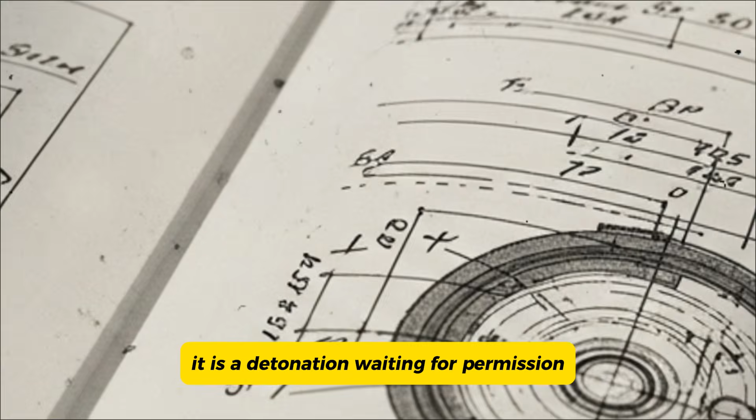In the spring of 1847, a locomotive sat idle on a siding outside Ghent, surrounded by government officials, 3 engineers, and a Belgian railway inspector who refused to go anywhere near it. He had read the reports. He knew what had happened in Prussia, in England, in the Netherlands. He wrote in his dispatch to Brussels that same afternoon, "This machine is not a locomotive. It is a detonation waiting for permission."

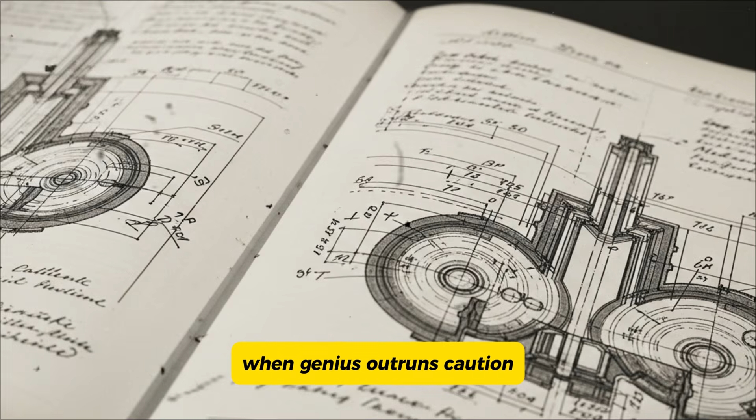Within 18 months, it would be banned across 12 sovereign nations. The locomotive was called the Pressawerk, and almost no one alive today has heard of it. That erasure wasn't accidental. The story of the Pressawerk is the story of what happens when genius outruns caution, when an engineer builds something that works magnificently, right up until the moment it destroys everything around it.

It is a story about ambition, about the terrifying gap between theoretical engineering and the chaos of actual operation, and about how one machine forced an entire continent to rethink what it meant for a railway to be safe. It began, as so many engineering catastrophes do, with a problem that needed solving.

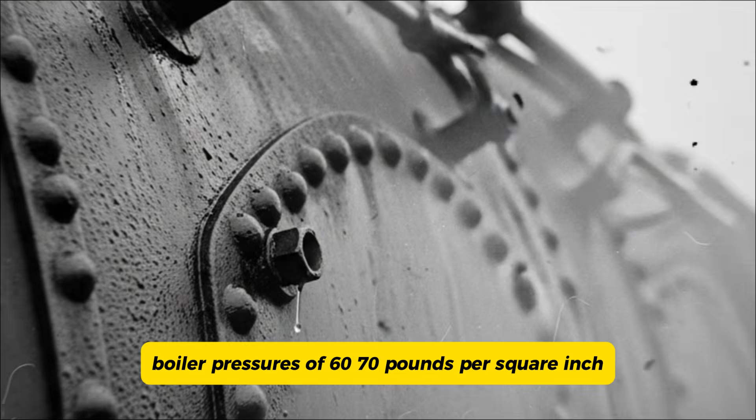By the early 1840s, European railways were growing faster than anyone had predicted. Lines were pushing into mountains, across river valleys, up grades that would have been unthinkable a decade earlier. The locomotives of the era, capable, proven, reliable, were hitting their limits. They could haul freight across flat terrain without complaint, but ask them to climb a sustained gradient with a full load, and they struggled. Boiler pressures of 60, 70 pounds per square inch gave you enough tractive effort for level track. But the mathematics of mountain railways demanded something more.

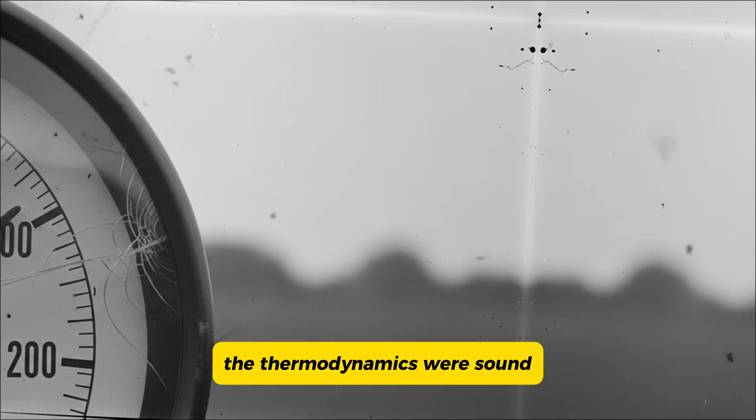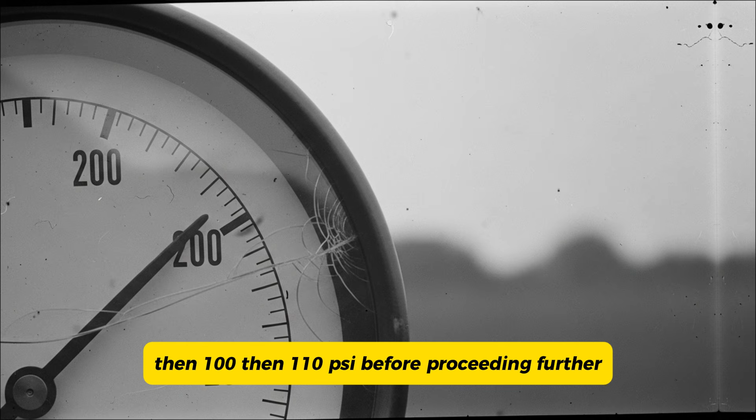A handful of engineers across Britain and continental Europe were working independently on the same solution: push the pressure higher, compress the steam further, extract more energy from every pound of coal burned. The thermodynamics were sound. The concept was elegant. The question was whether the metallurgy of the 1840s could hold it together. Most engineers approached this problem carefully, incrementally, testing at 90, then 100, then 110 psi before proceeding further.

A German engineer named Heinrich Oberfeld approached it differently. Oberfeld was not reckless. His notebooks, which survive in the Bundesarchiv in Koblenz, reveal a meticulous, almost obsessive thinker. He had spent 7 years working on boiler design, had corresponded with George Stephenson, had studied the atmospheric railway experiments in Ireland. He understood steam better than almost anyone in Europe.

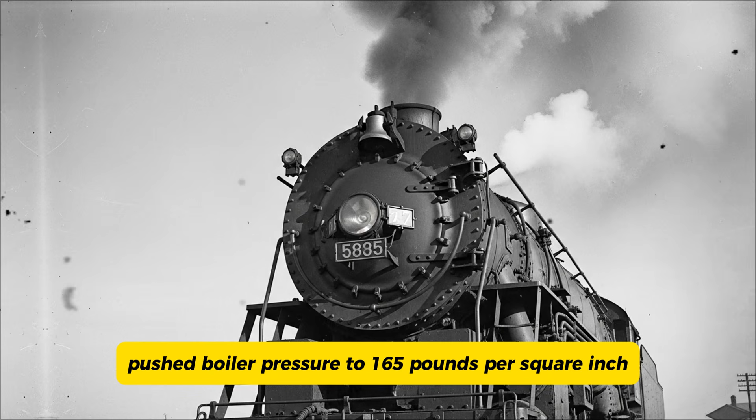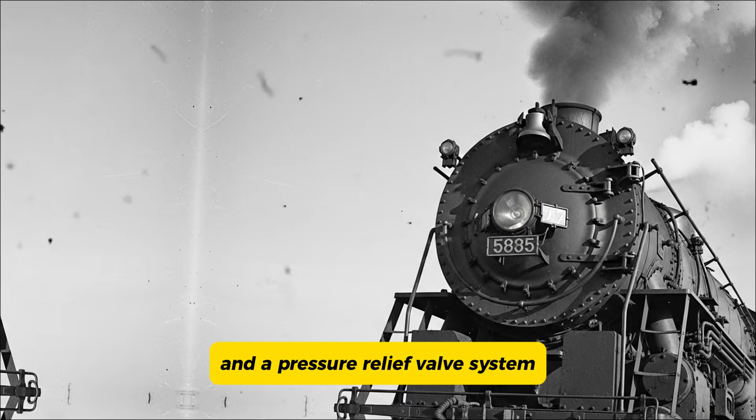What he perhaps did not fully understand was the compound effect of manufacturing inconsistency, operator error, and sustained vibration on metals under extreme stress. His design, finalized in 1845, pushed boiler pressure to 165 pounds per square inch, more than double what most contemporary locomotives operated. To manage this, he engineered a thicker boiler shell, a series of internal baffles he believed would distribute stress more evenly, and a pressure relief valve system that he calculated could vent excess steam before catastrophic failure occurred.

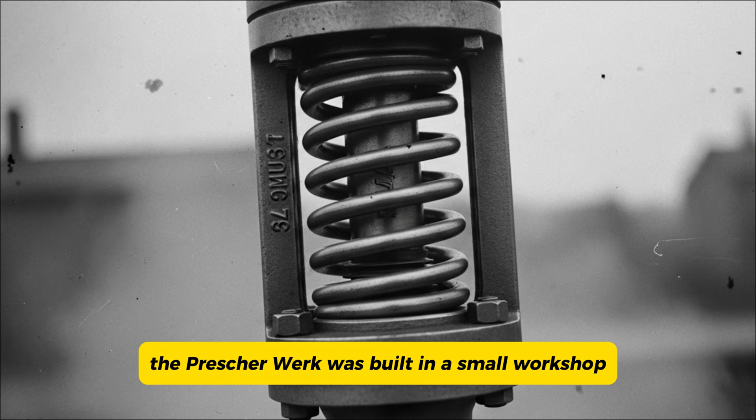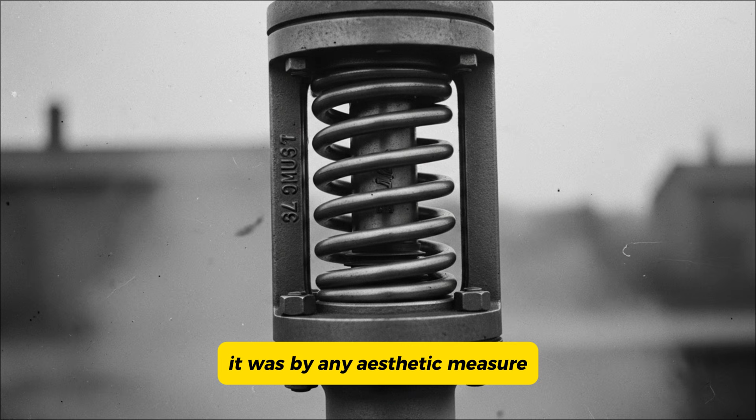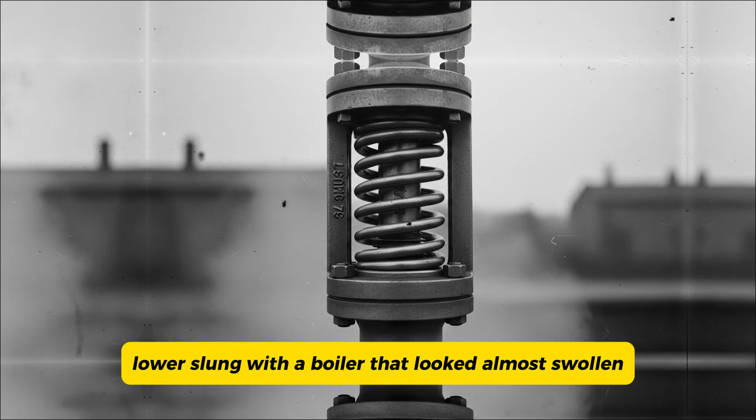The Prescher Werk was built in a small workshop outside Düsseldorf in the winter of 1845 to 1846. It was, by any aesthetic measure, an extraordinary machine. Heavier than most locomotives of its class, lower slung, with a boiler that looked almost swollen compared to its contemporaries. Observers who saw it described feeling vaguely uneasy without being able to articulate why. One railway correspondent wrote that it looked as though it was holding its breath.

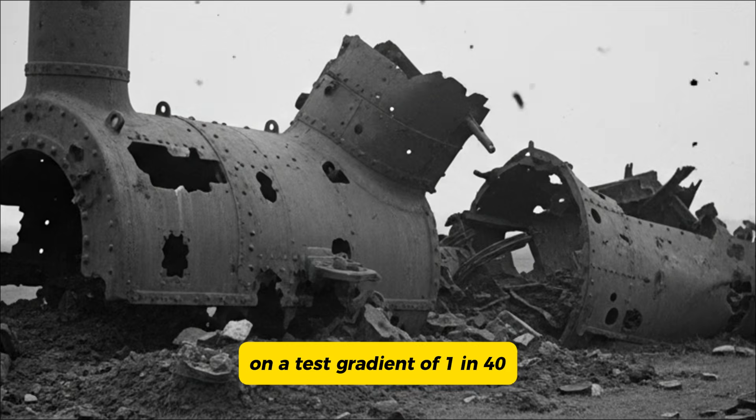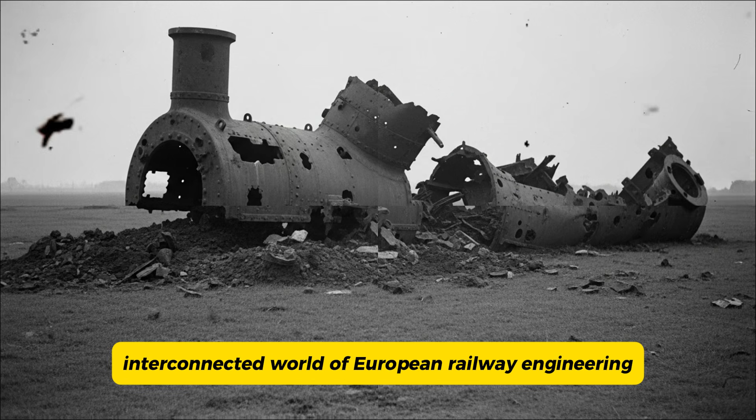Initial trials, conducted on a private stretch of track in the spring of 1846, were spectacular. The Prescher Werk hauled loads that would have stopped any other locomotive of its era. On a test gradient of 1 in 40, steep by the standards of the day, it maintained speed with a load of 380 tons. The numbers were extraordinary. Word spread quickly through the small, interconnected world of European railway engineering.

Orders came in: 3 from Prussian railway companies, 2 from the Netherlands, 1 from a Belgian operator planning a new mountain route. Oberfeld's workshop scrambled to produce them, and here, perhaps, was the first moment where something went wrong, not dramatically, not catastrophically, but quietly, in the tolerances. Workshop production under pressure is not the same as workshop production under careful supervision. The baffles in some units were seated slightly differently.

The boiler shells, sourced from a second supplier to meet demand, had marginally thinner walls in certain sections. The pressure relief valves, produced in small batches, had variations in spring tension that inspection at the time could not detect. None of these deviations were dramatic. Each one, individually, was within what the engineers of the era considered acceptable margin. Together, they were a catastrophe assembled in pieces.

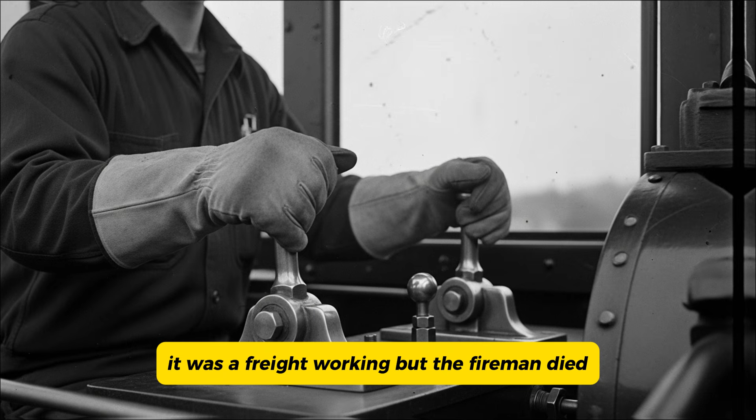The first explosion occurred in October 1846, outside Aachen. No passengers were aboard. It was a freight working. But the fireman died, and the driver lost both legs below the knee. The boiler did not simply rupture, it detonated. Observers a quarter-mile away reported hearing it clearly. A piece of boilerplate was found embedded in a farmhouse wall 200 meters from the track.

Investigations were inconclusive, as investigations in 1846 tended to be. The surviving locomotive was examined, found to be superficially intact, and returned to service after 3 weeks. The second explosion occurred in January 1847 in the Netherlands near Utrecht.

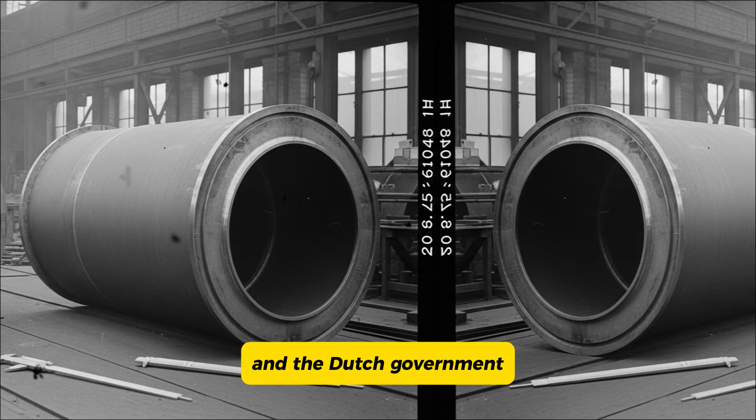This time, a passenger train. 4 dead, 9 injured. And the Dutch government suspended operation of all Pressurewerk-type locomotives within 48 hours. Now the reports began to accumulate.

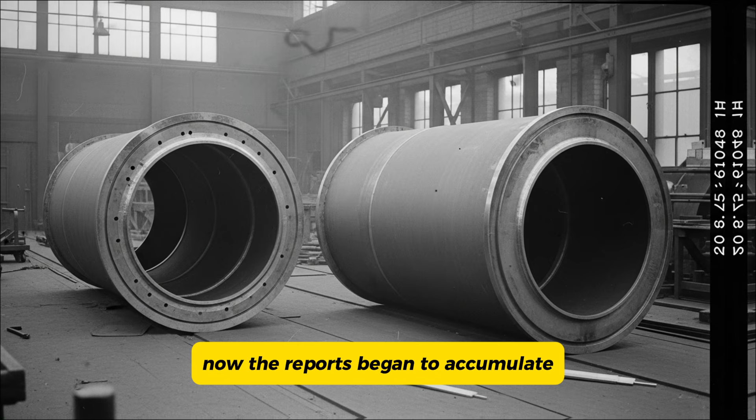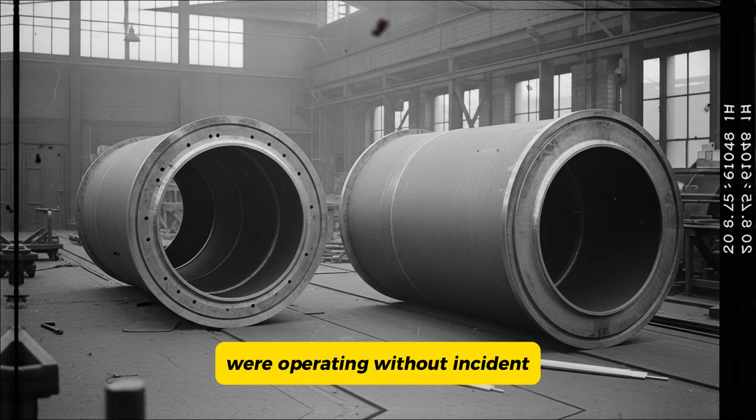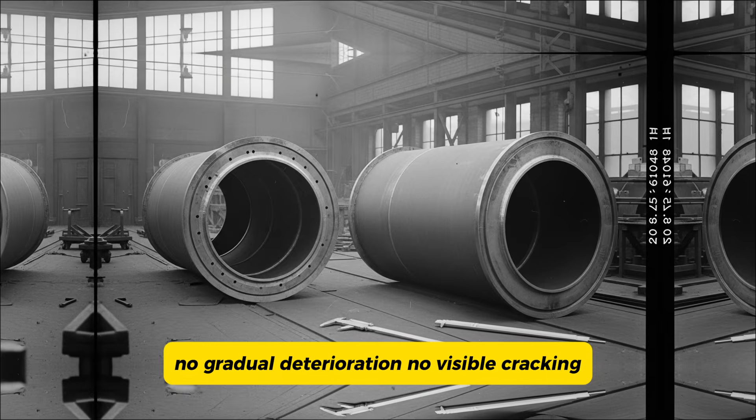Not all explosions, that is important to understand. The majority of Pressurewerk locomotives in service were operating without incident, but the minority failed catastrophically and without warning. No gradual deterioration, no visible cracking, no time to react. Operators described full pressure one moment, annihilation the next.

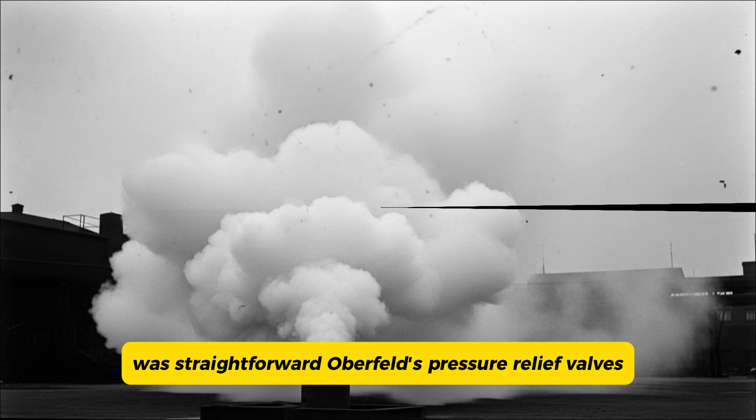The physics, understood now though not fully grasped then, was straightforward. Oberfeld's pressure relief valves required a precise combination of spring tension and valve seat geometry to function correctly. Units where manufacturing variation pushed these outside a narrow band did not vent properly. Pressure built silently past the design threshold.

When the boiler shell gave way, and with sustained vibration and thermal cycling, it eventually would, the stored energy released instantaneously. It was not a steam leak, it was a bomb.

By the spring of 1847, the mathematics of political reality had overtaken the mathematics of engineering. Belgium banned the Pressurewerk type in April. Prussia followed in June. France, which had never purchased the design, banned its import and transit in August. A largely symbolic act, but one that signaled which way sentiment was running.

By the end of 1848, 12 nations had issued formal prohibitions. Oberfeld's masterwork, the locomotive that could climb where nothing else could climb, was illegal from Edinburgh to the outskirts of Vienna.

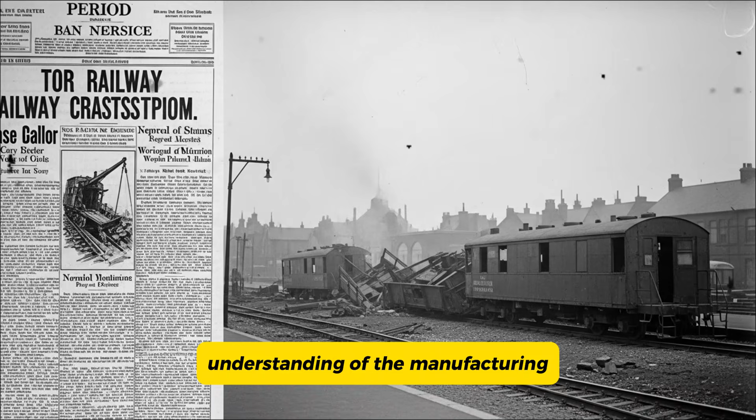Oberfeld himself spent the remaining 15 years of his life attempting to redesign the system. His later notebooks show increasingly sophisticated understanding of the manufacturing inconsistency problem. He proposed what would now be recognized as a form of statistical quality control, systematic measurement across production batches, rejection criteria, traceability of materials. For 1850, this was genuinely advanced thinking. None of it was adopted.

No railway company wanted the Pressurewerk name near their operations. The brand was poisoned. Engineers who had praised the design publicly in 1846 declined to associate themselves with it by 1848. The institutional memory that formed around the Pressurewerk was not a technical memory, not an analysis of what had gone wrong and how to fix it, but a social memory. This machine kills. Stay away. And so, the high-pressure approach was abandoned across Europe for nearly 3 decades.

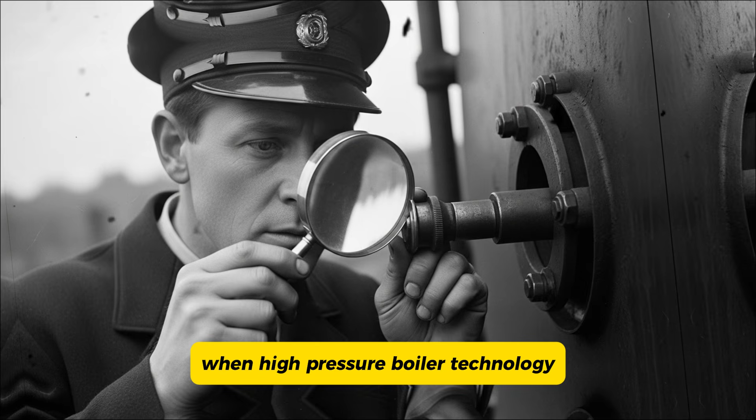Here is the part that complicates the simple story of a dangerous machine rightfully banned. When high-pressure boiler technology returned to European locomotives in the 1870s and 1880s, it did so with better metallurgy, better quality control, better pressure relief engineering, and it transformed railway performance. The mountain lines that the 1840s operators had dreamed of became reality.

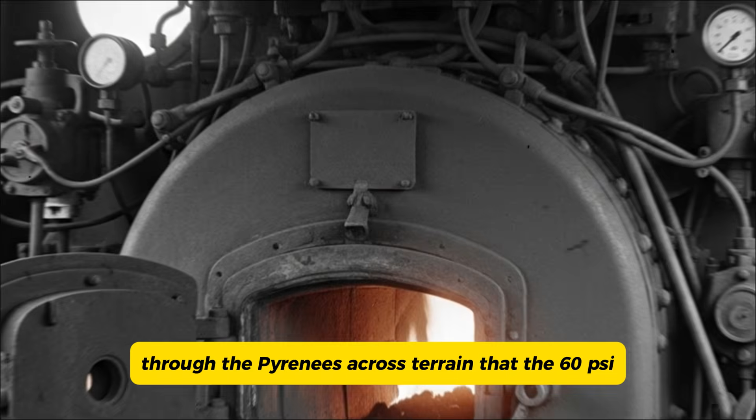Locomotives running at 180, 200 psi hauled trains over the Alps, through the Pyrenees, across terrain that the 60 psi engines of Oberfeld's era could never have managed. The engineering principle was not wrong. The execution was catastrophically, fatally premature.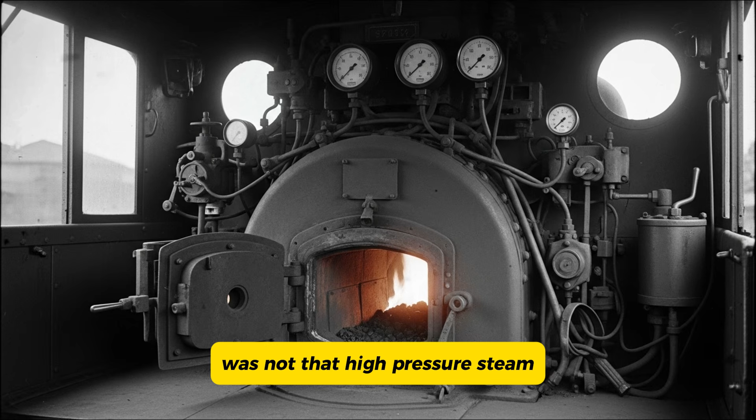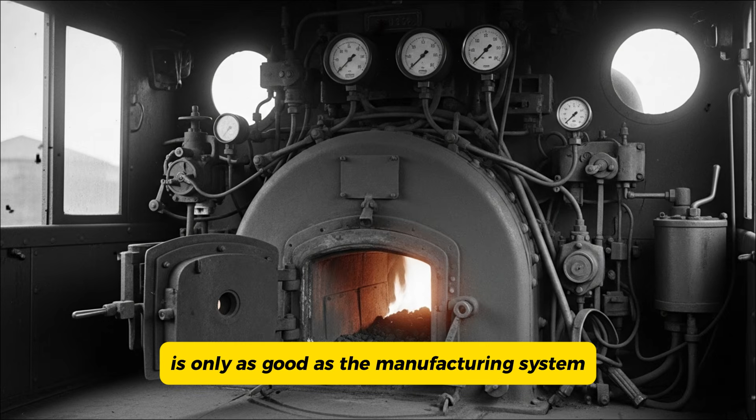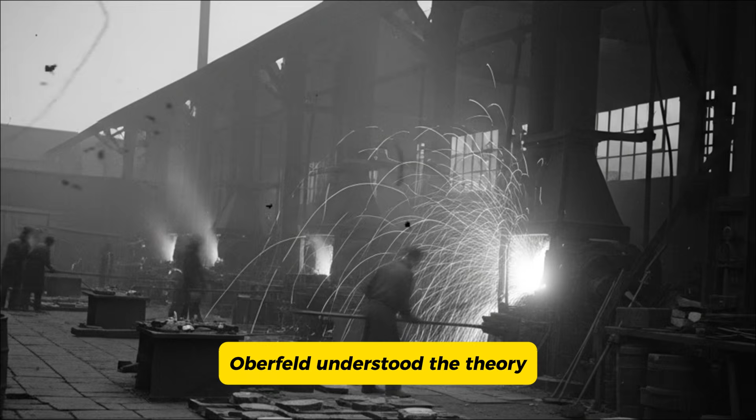What the Pressurewerk proved was not that high-pressure steam was too dangerous for railways. What it proved was that an engineering advance is only as good as the manufacturing system capable of producing it consistently and the operational system capable of managing it safely. Oberfeld understood the theory. He could not control the variation. And in 1846, with the inspection tools available, with the metallurgical standards available, with the workshop practices available, nobody could.

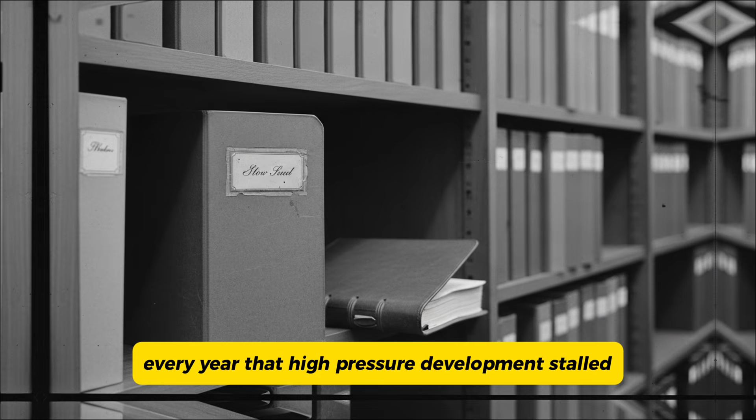The 12 bans were not irrational. In context, they were the correct response to an uncontrollable risk. But they also froze development for a generation. Every year that high-pressure development stalled was a year that mountain railways remained unbuilt, that passengers traveled slower, that freight moved less efficiently. The cost of the bans was real, even if the bans were right.

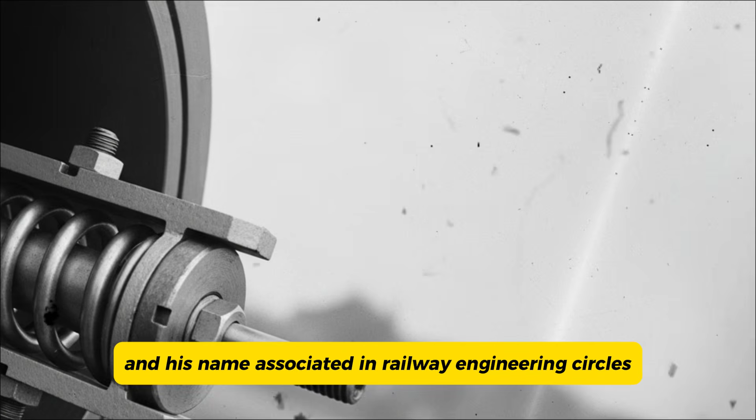Heinrich Oberfeld died in 1862, largely forgotten, his name associated in railway engineering circles with failure and catastrophe. The notebooks survived because a nephew donated them to a Koblenz archive in 1891. They sat uncatalogued for 40 years.

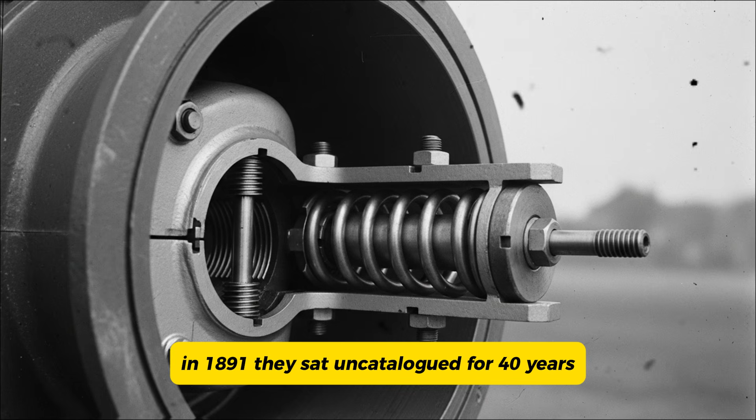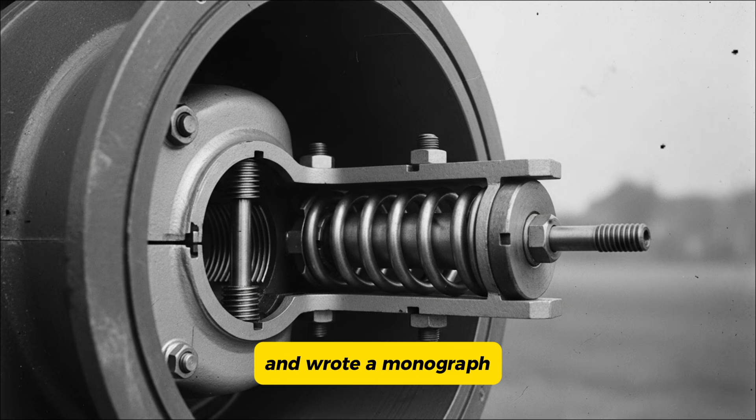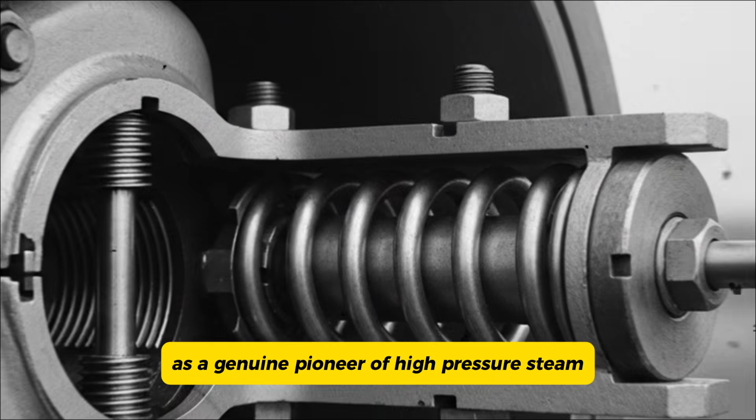A German railway historian named Franz Bauer examined them in the 1930s and wrote a monograph, published in a small circulation journal, never translated, arguing that Oberfeld deserved recognition as a genuine pioneer of high-pressure steam rather than simply a cautionary tale. Nobody much listened.

The Pressurewerk itself left almost no physical trace. Of the 14 locomotives built, all were either destroyed in explosions, scrapped under government order, or cannibalized for parts. No complete example survives. There are 3 photographs, all of questionable authenticity.

The machine that was banned across 12 nations, that killed at least 19 people across documented incidents, that might, in a different manufacturing environment, with different quality controls, have accelerated European railway development by 30 years, exists now only in archives that almost no one visits. Perhaps that is appropriate. Perhaps some machines should remain in the records rather than on pedestals.

Or perhaps the question is more uncomfortable than that. How many advances that seemed too dangerous were simply too early? How many Pressurewerks sit in archives, waiting for a moment that came decades too late for the person who first imagined them? The Belgian inspector who refused to approach the locomotive in 1847 was not wrong to be afraid. But somewhere in the distance between his caution and Heinrich Oberfeld's ambition is where railways, and perhaps all engineering, actually live.